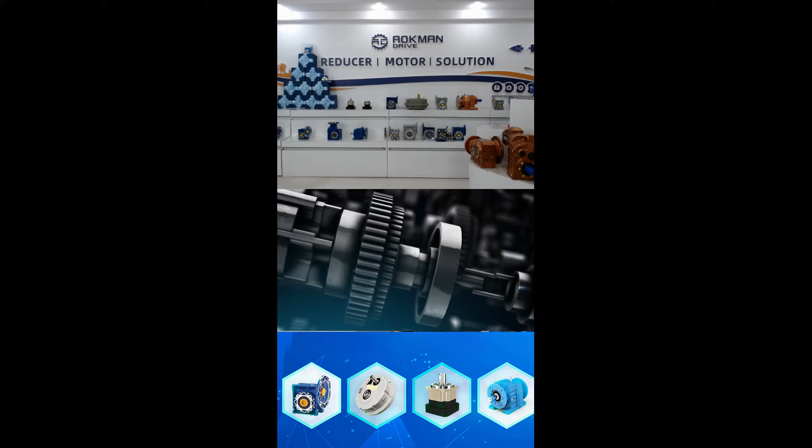AOKMAN, a leader in the manufacturing of special industrial gear units and standard gear motor. The factory was founded in 1982.

800,000 square meters of surface. Production made of more than 2,000 experienced workers. Over 30 years of experience in gearbox manufacturing.

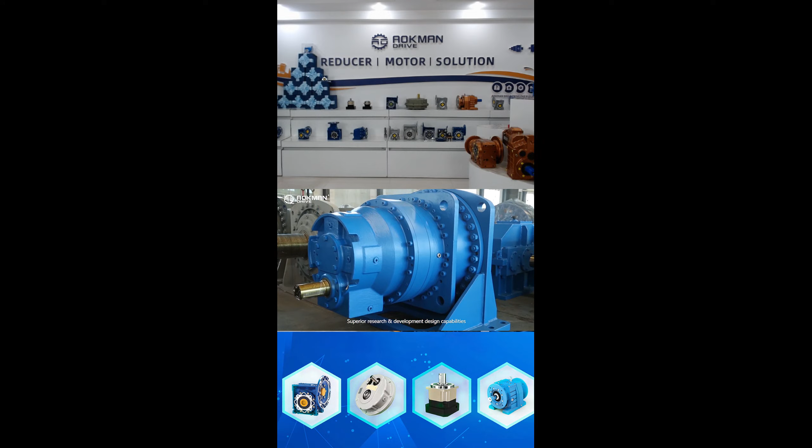AOKMAN always improved gearing technologies with the spirit of craftsmen. Superior research and development design capabilities have become the primary productive force of AOKMAN's rapid development.

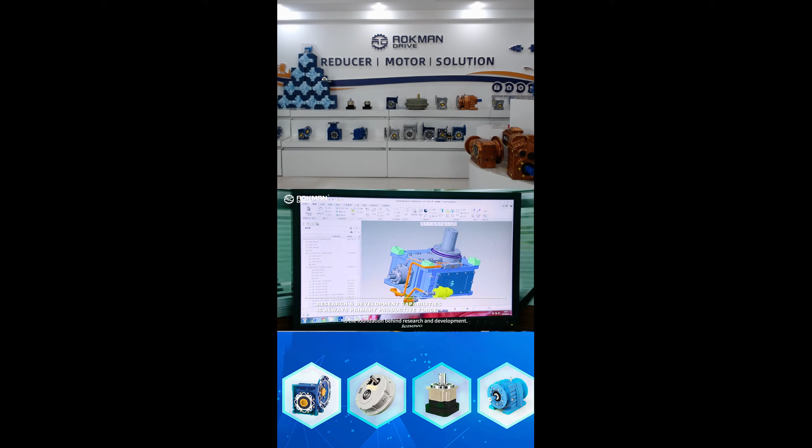R&D concept. Inspiration to provide the perfect drive solution for our customers is the foundation behind research and development. AOKMAN has a professional gear and reducer technology research and development team and reached the international advanced level in the technology of gear, reducer, and power transmission elements.

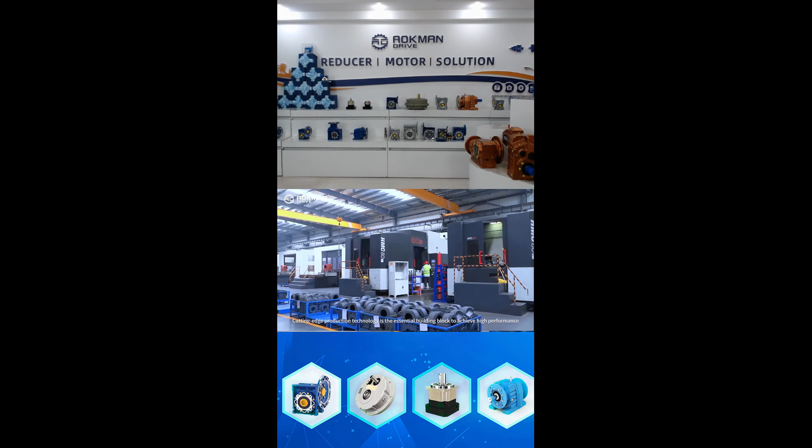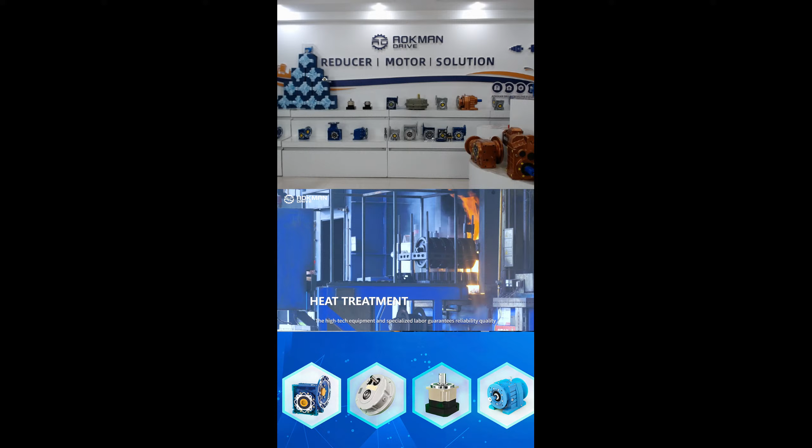Mechanical machining. Cutting-edge production technology is the essential building block to achieve high-performance geared products in order to meet what AOKMAN's customers are asking for. The high-tech equipment and specialized labor guarantees reliability, quality, and uniformity of heat treatment processes.

The industrial complex has been steadily upgraded with leading-edge machinery which ensures quality according to international norms and standards: ISO, DIN, and AGMA, and precision in producing gears with quality grade 6, ISO 1328.

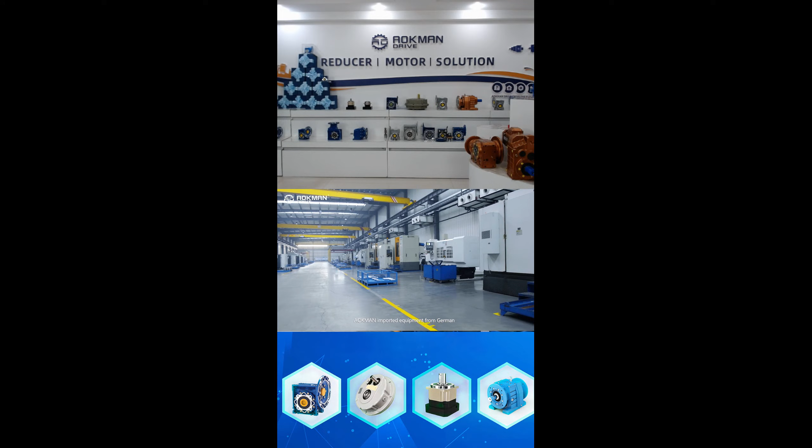AOKMAN imported equipment from Germany, such as the CNC gear teeth grinders and milling cutters. The Niles and Hoffler gear controller allows for ideal precision in gear production. AOKMAN factory offers the most efficient high-precision production lines, flexible and specialized assembly coating lines, and a digital management system.

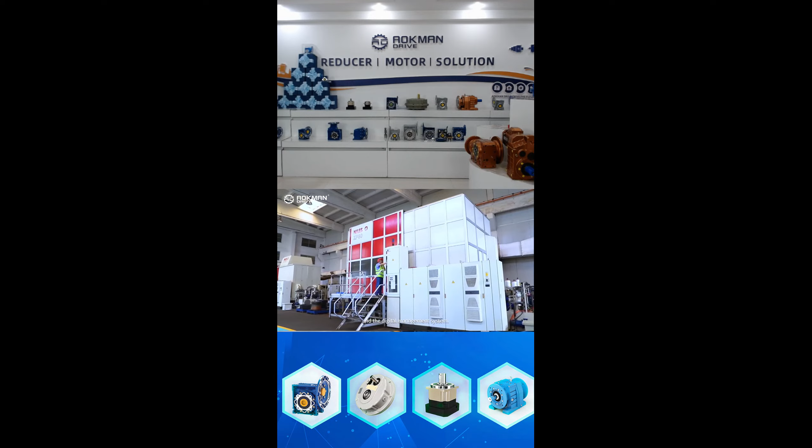Protect the environment by using natural resources wisely and seeking benefits to society and the environment.

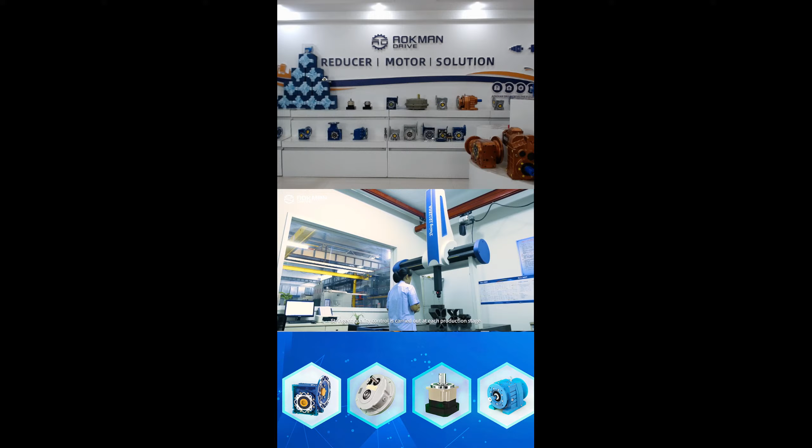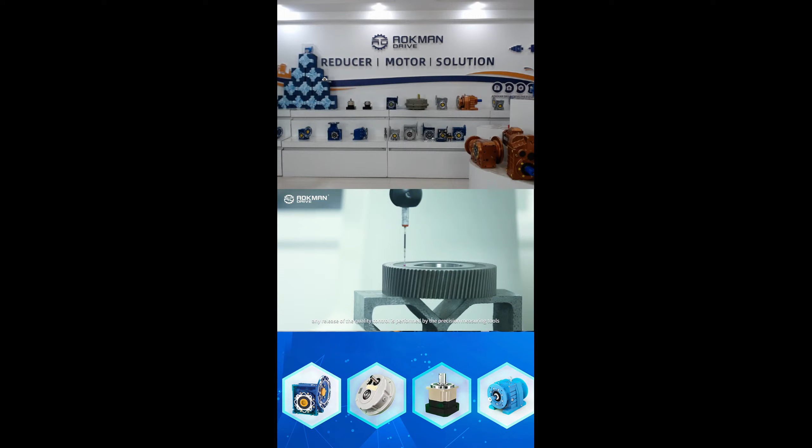Quality control. At AOKMAN, we know quality is very important to our customer, and we instill that responsibility in every employee. Stringent quality control is carried out at each production stage, from arrival of the raw materials to delivery of the tested, approved products. Any release of the quality control is performed by precision measuring tools and modern measuring equipment.

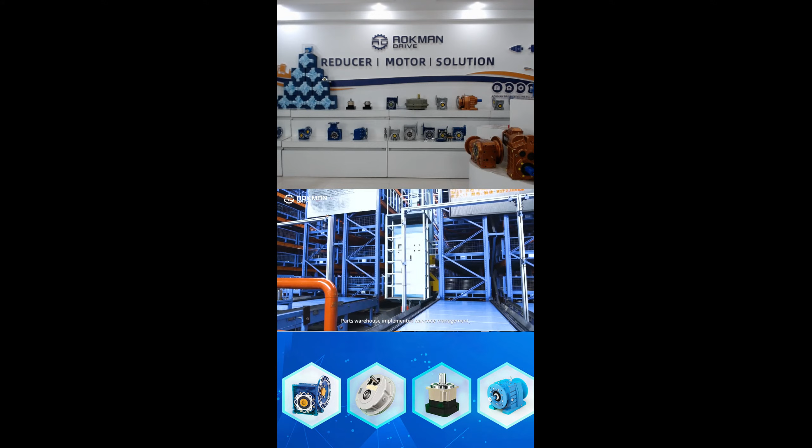Warehouse. Warehouse information management is the key to improve efficiency and fast delivery. Parts warehouse implemented barcode management, and the inventory accuracy reached over 90%. After the implementation of AOKMAN Factory Information Platform, the production capacity increased by more than 50%.

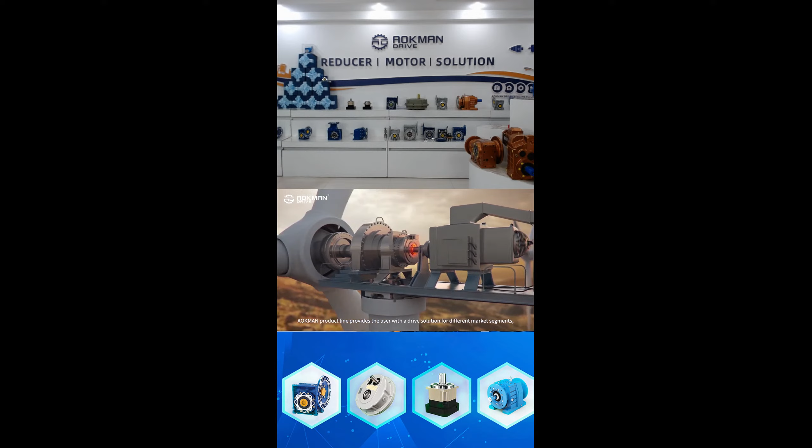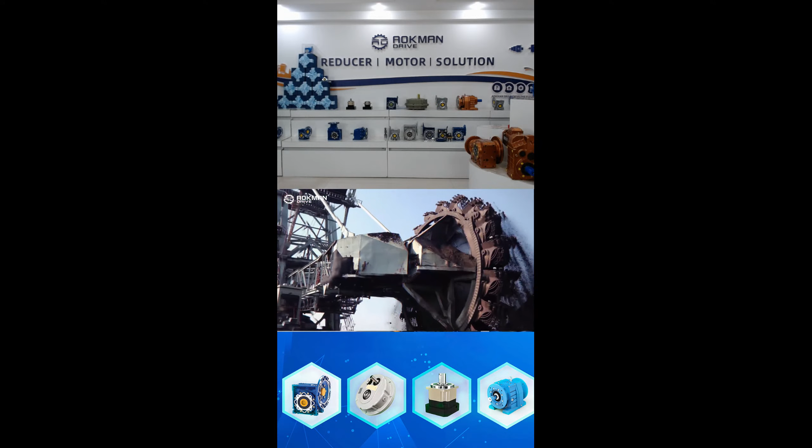Market application. AOKMAN product line provides the user with a drive solution for different market segments, such as cement drive, sugar mill, mining, pulp and paper, metallurgical, textile, packaging, agriculture, construction, food industry, automation, palm oil, and various other types of machines.

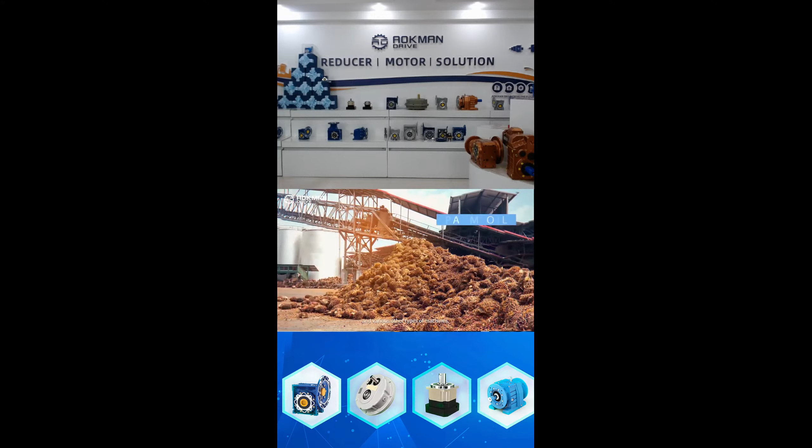Customer service. The product quality of AOKMAN allies to the security and efficiency of its management, which makes it a brand synonymous with credibility with its suppliers and customers. We are committed to winning a partner rather than a simple supplier.

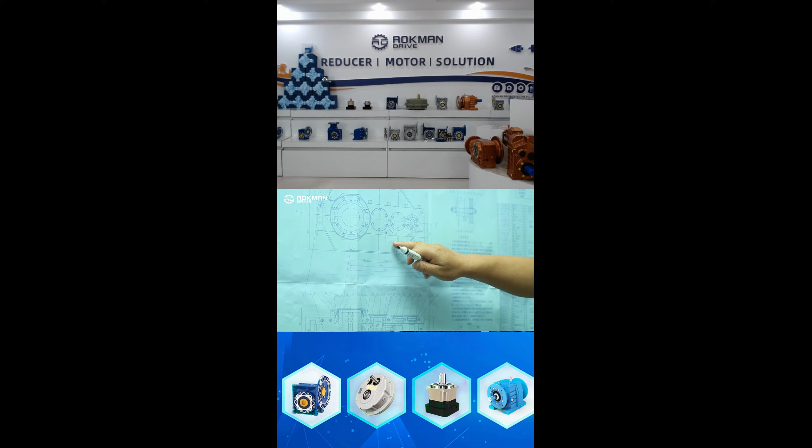Make a good deal? Always consult AOKMAN professionals. We assure you of the utmost reliability and security for both products and services. We are AOKMAN, the total drive solution provider.

AOKMAN, a leader in the manufacturing of special industrial gear units and standard gear motor. The factory was founded in 1982.

800,000 square meters of surface. Production made of more than 2,000 experienced workers. Over 30 years of experience in gearbox manufacturing.

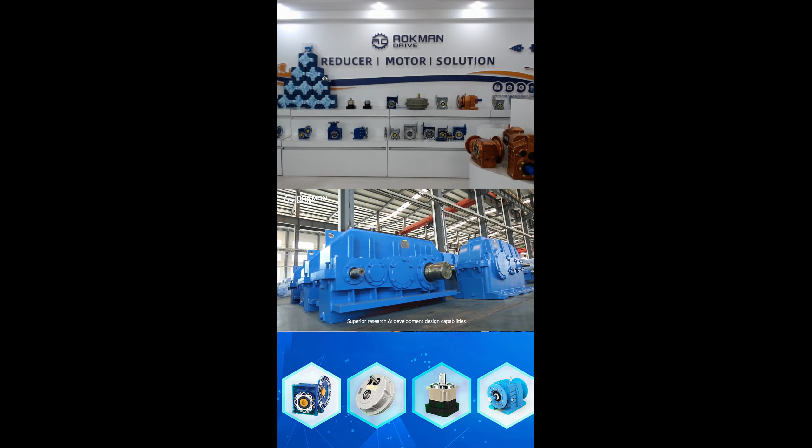AOKMAN always improved gearing technologies with the spirit of craftsmen. Superior research and development design capabilities have become the primary productive force of AOKMAN's rapid development. R&D concept.

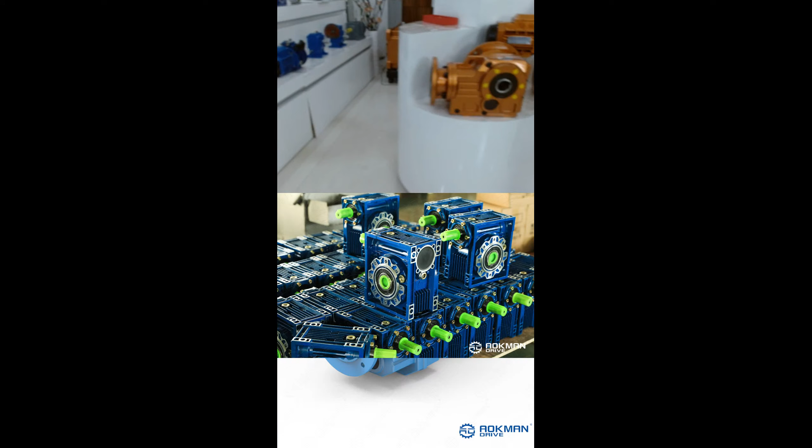Okay, next we show another popular item. You can see these gold colored items, we call them helical gear motors. Actually there are 4 items: helical bevel, helical parallel, helical inline, and helical worm. They're all made with steel cast iron housing, different from the worm gearboxes. But they all look very beautiful because we make very precise precision on the outlook. They're so popular because they provide very wide range ratios and torques, so they can meet a majority of applications in the market.

I guess many of you start your business or enlarge your business may start from these items. It will help you, it will benefit your business.

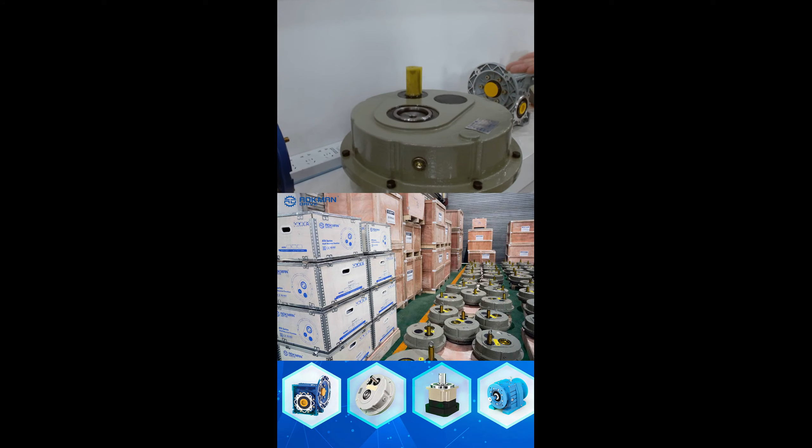Okay, next we show you the shaft-mounted gearboxes. This one we call the TA series gearbox. Like Cassie said, this is a shaft-mounted gearbox. We can tell the details and design is like a round one. This one has wide application in mining, quarry, and conveyor belt related industries. AOKMAN here is the best supplier here. The reason is from the design, quality, production capacity, and all the details, we can tell we are the best TA series supplier in China. So if you're looking for this kind of gearbox, AOKMAN will be your best choice.

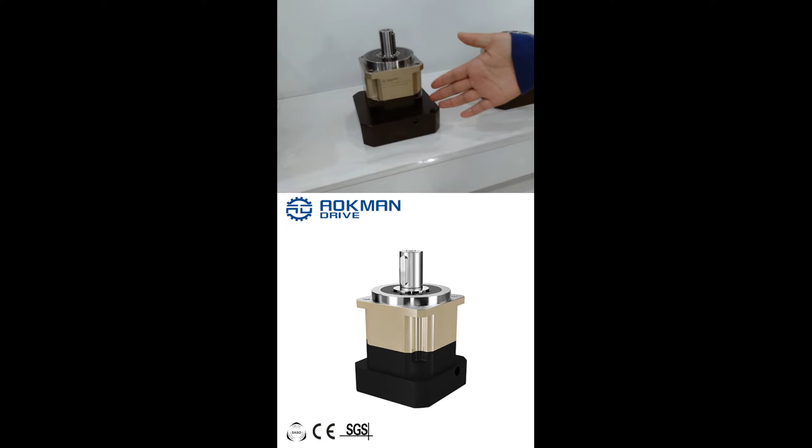This one we call high precision planetary gearboxes because it provides very precise backlash, so it can be useful on CNC machines, AGV trucks, printing machines, and machinery arms for robotics, for turning. So if you need very precise control, you need to consider this one. I think this one is very popular this year and will continue to be popular in the coming years.

Okay, we have finished showing all the standard popular items. I think many of you already have a brief idea about this. If you need more features or want to know how to identify this item, don't go anywhere, stay in the live show. My colleague will show you more details later.

Okay Kurt, we have shown the standard items already. Yes, so AOKMAN here, this is the first part of our products, the standard items. Standard items mean we can produce a lot at one time, but we can also satisfy other projects we call custom-made projects, because some customers have special requests. So Cassie, do you have such experience or a project example? Yeah sure, actually custom items are another strength for AOKMAN because we have 300 people in our R&D department. They can design your paperwork, your draft strategies into reality.

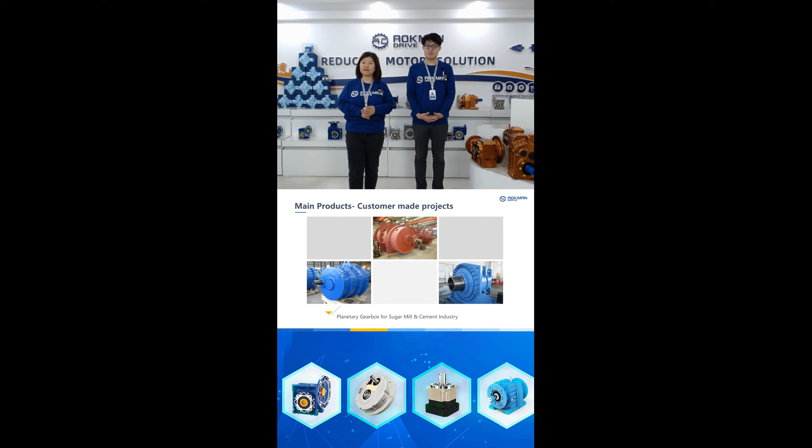Okay, next you will see we have planetary gearboxes. They are used on sugar mills and heavy-duty applications like cement and mining. Okay, next you'll see special items. This one is different from the standard items, the shape is very different. We provide custom items considering not only function but also installation dimension requirements.

So even though they look very special, we need to keep the cost down at the same time. So we just finished the product part.

Some of the audience and customers may be wondering how we prove we are the best or one of the leading gearbox manufacturers in China. We are going to move to the next part, the investment, because we actually invest a lot of money on equipment.

Let's go to the next picture. This one is also from Europe, one of the top brands, from Austria. It's used for the heat treating process, which is very important for the gear. It increases the hardness and also increases the lifetime of the gear.

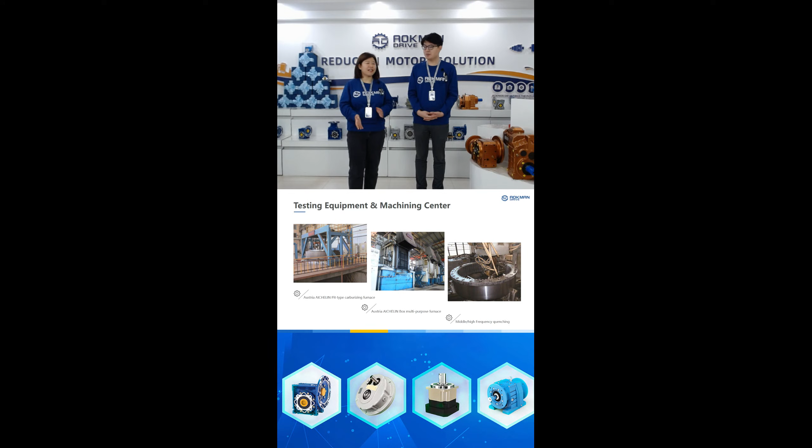Finally, this will save the customer money. Okay, let's move to the next picture.

Here is a real shot of our CNC workshop. This is where we process our parts and accessories, lined up really well. We use all process machines imported from Europe and the US. This one is actually from the USA, one of the top 5 brands.

So we invest lots of money on equipment, because that way we can make sure we always choose from the best supplier and also make sure our quality is good.

We have given a brief introduction about our product and equipment. I think many of you may be wondering how about AOKMAN quality control. This is very important for our customers, and also for us.

We have ERP meetings before each project and production moves forward, involving the technical department, the production department, and the QC department. Sometimes we invite our sales department to attend this meeting to make sure we understand the customer requirement while also keeping the cost down.

Another thing is from raw material to delivery of the finished item, the whole process is finished inside our factory. This helps production move more smoothly, while at the same time keeping quality control stable.

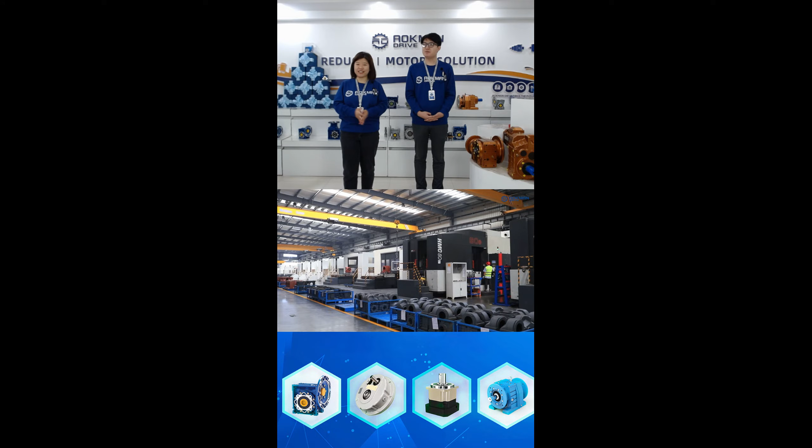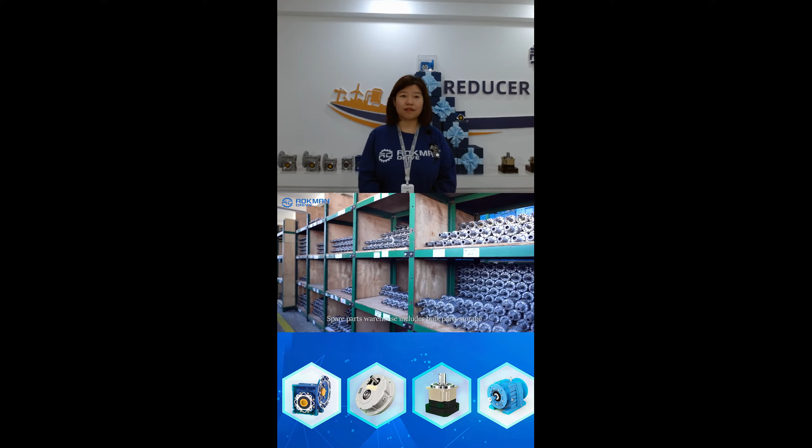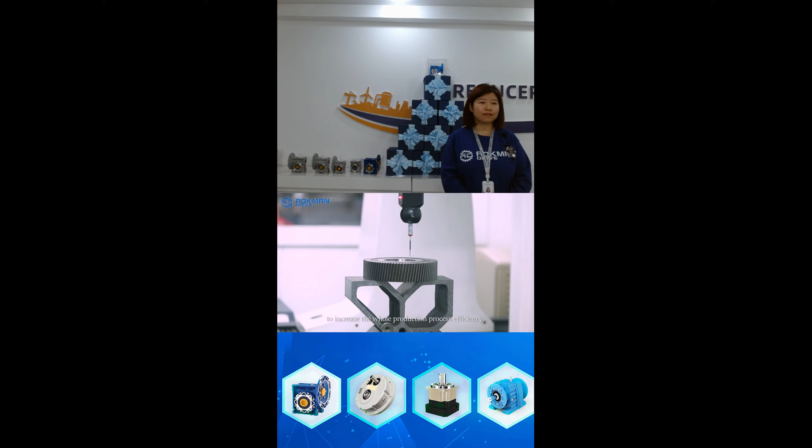AOKMAN spare parts are available. This not only shortens the delivery time, but also meets customers' bulk orders. The spare parts warehouse includes bulk parts storage, housing part storage, gear storage, and so on. It adopts an automated management system and AGV delivery method to ensure production is finished on time. AOKMAN QC checks each part before storage to increase overall production efficiency and ensure gearbox quality.

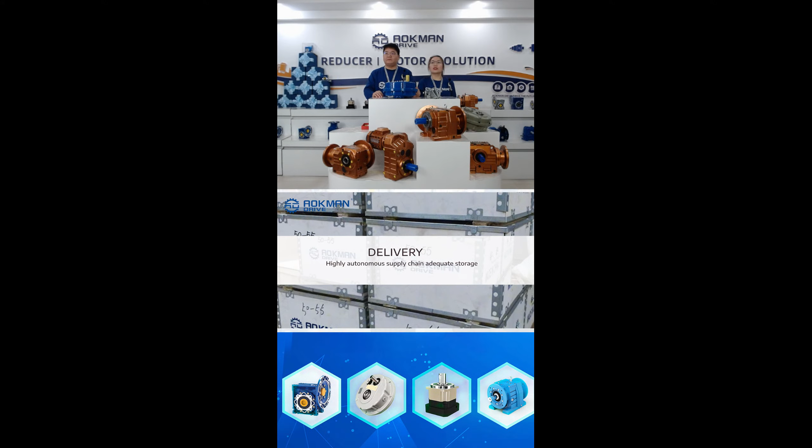This is a gearbox in our factory, and this is a semi-finished product. This is the packaging, this is QC, and this is our delivery. This is our factory equipment, and our colleagues are packing and testing them. This is the application in mining.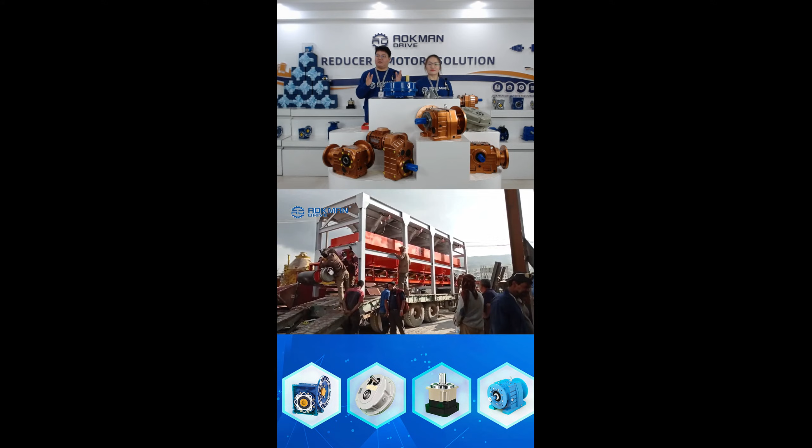Okay, this is our ATA gearbox warehouse. This ATA gearbox is used with the belt conveyor, like this. And this is the mining factory and quarry. So great, this is so great.

Okay, this is our AOKMAN ATA gearbox used in our customer's factory. Many thanks for watching this video. If you have any questions and need more details, please tell me. I will reply as soon as possible. And follow us and follow AOKMAN in the future. If you have any question, we can help you.

Just now we saw the video from our clients' feedback, because if you are in belt conveyor, stone crusher, mining industry, the ATA shaft mounted gearbox is your best choice. The ATA gearbox is most popular and welcomed in this business, like mining, quarrying, stone crusher, belt conveyor, and roller.

Except the ATA shaft mounted gearbox, we also have helical gearbox, helical bevel, and other industrial gearboxes also used in these plants. Today we are mainly introducing for you the ATA shaft mounted gearbox. It generally will be used in high shock loads, dirt, and corrosive environments. So the ATA shaft mounted gearbox has good sealing and dust-proof function, giving absolute reliability and low maintenance cost.

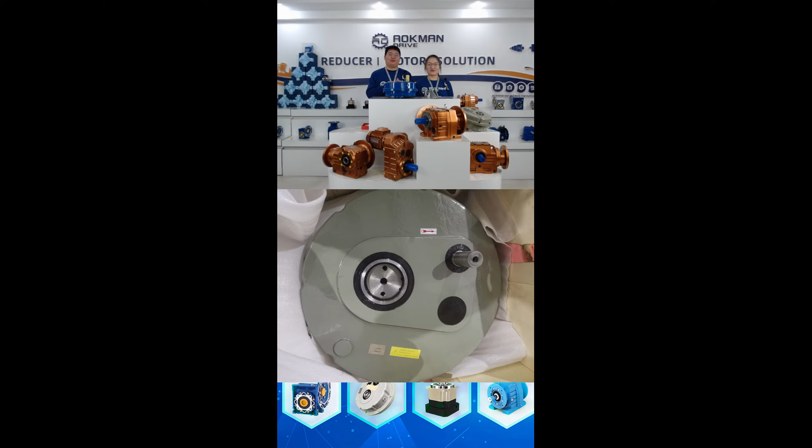Green and blue are the most popular colors in our market. So if you are interested in our shaft-mounted gearbox, please leave a message to our customer service department and send your requirements. We will reply at once. Just now we talked about the color, the ratio, the bore size, and so on. Not only is the gearbox good, our packaging design is also very amazing in the market. So next, Andy will show some pictures to introduce our ATA gearbox packaging design.

Okay, you can see these pictures. This picture is for our small model. There will be a white part, you can see that is a soft material. We will cover the shaft-mounted gearbox with it to protect the gearbox during transportation.

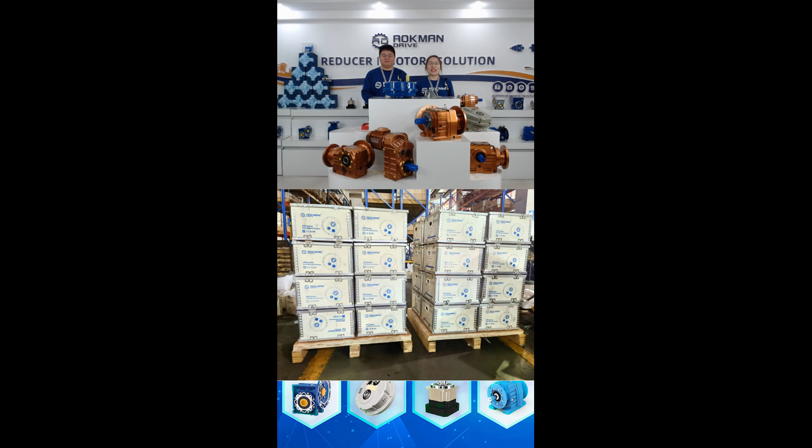Next, you can see that is very beautiful packaging, customized design for our distributors. You can see one pallet - through these pictures, we can see one pallet with 12 pieces for smaller packaging, for smaller gearbox models such as 40, 45, 50, and 55 like this. One pallet may have 12 pieces, or maybe 24 pieces, depending on the gear size.

Okay, you can see this - I think you asked one question. This picture is for a larger gearbox model. Yes, the bigger models such as 70, 80, 100, 125, and 135, we have this packaging design. For the bigger model sizes like this, we will pack it separately, and the wooden packing is thicker.

We can see the bottom with wooden feet. The wooden feet make it easy for delivery. It's a very humanized design because with the wooden feet, it will make the transport easier, make the worker's job easier. Okay, let's check the next picture, please.

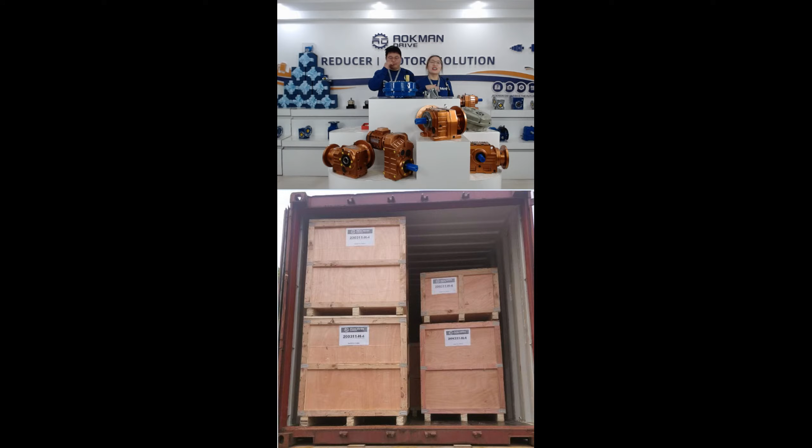One container goes into our client's warehouse or factory. For one container of gearboxes, there are about 200 to 220 pieces. Because the shaft-mounted gearbox is very popular in our market, our clients ordering one container or 5 containers is very common, because this gearbox is popular in their market.

So next, I want to show you a packaging video to share more details. Yes, this is the green color. This is the one container of gearboxes finished and ready to ship to our customer.

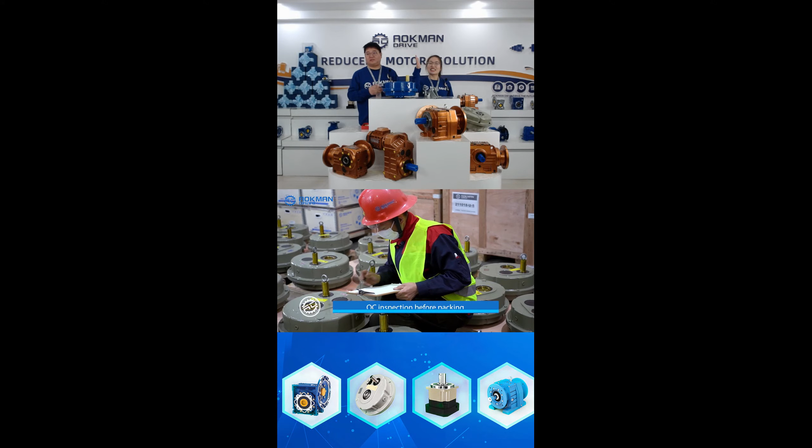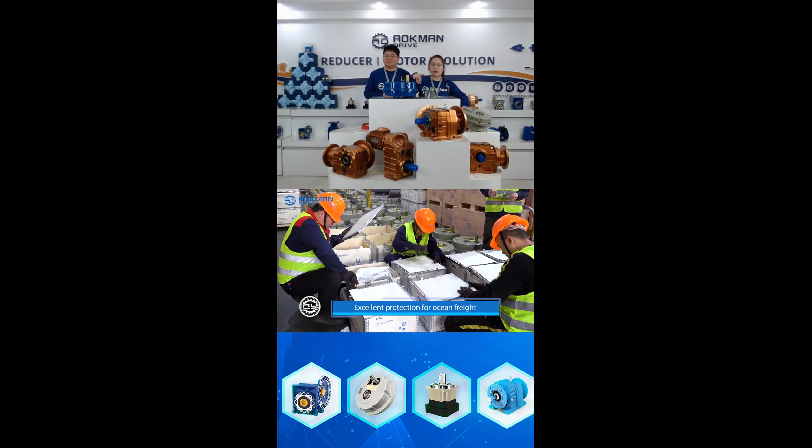So for our gearbox, we make sure our quality is the best. The video you just saw was very short. Maybe in the showroom you can only see the short video. If you want to get this video, you can contact our customer department and we can send it to you to check on your own phone.

We have lots of pictures and videos for our gearbox, such as boxing, packaging, quality and finished gearbox. If you want more details, send your email and mobile phone number and I will send this picture and video to you as soon as possible. You can show this video and picture to your customers.

Because AOKMAN shaft-mounted gearbox is professional, if you want to know more details, please contact our service department at once. Please remember, free samples are also available in our showroom. You can get a free sample to test our quality, see our color, and check the import and

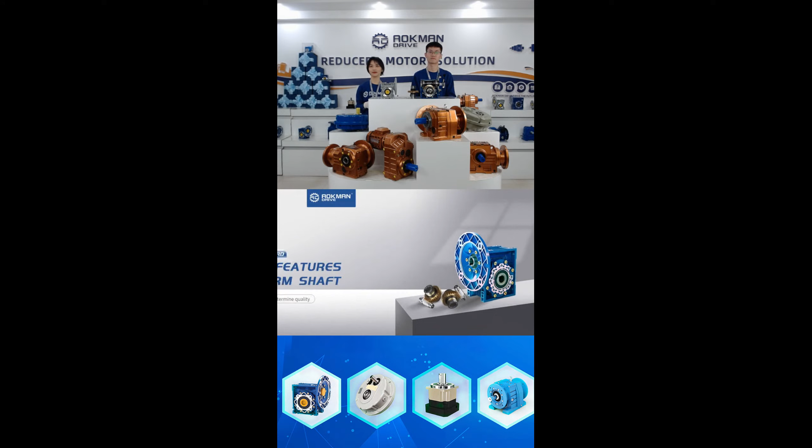This is inside of the worm gearbox. It's bearing, worm shaft, and worm gear. This is AOKMAN worm shaft compared with others, and it's very clean. Is this for the detection?

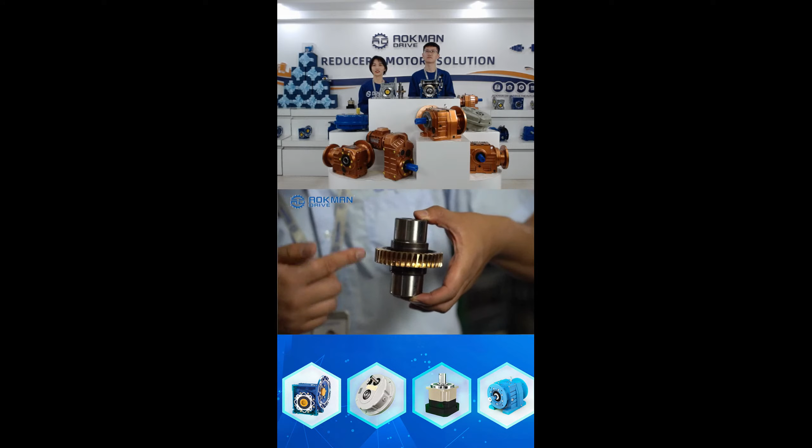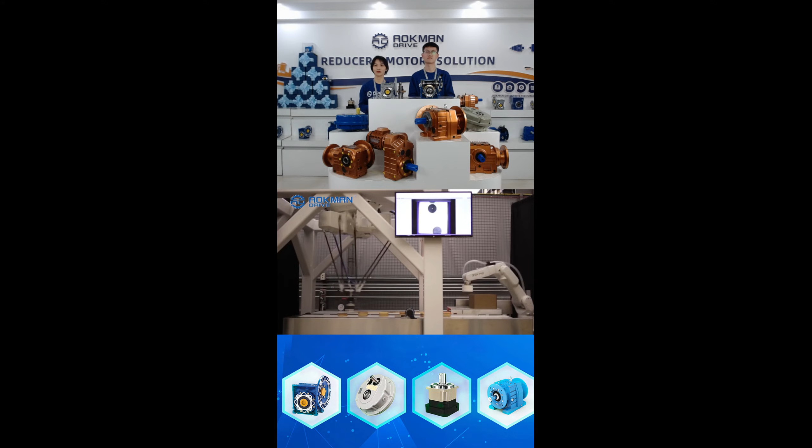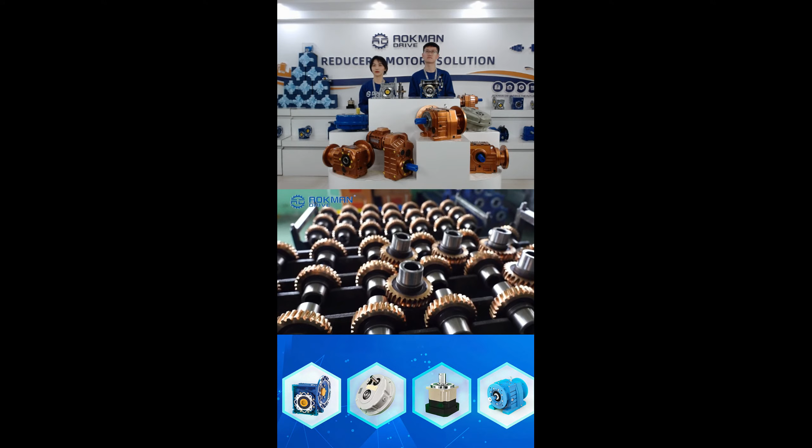Why is AOKMAN RV better? AOKMAN worm gear has an involute tooth profile, which has high transmission efficiency and has been chamfered. The noise during work is low, and the transmission accuracy is greatly improved. In contrast, other brands use an Archimedes tooth profile with relatively low transmission efficiency and no chamfering process, making the worm wheel noisy during work. Furthermore, the worm gear and worm shaft are easy to collide, which seriously affects transmission accuracy. AOKMAN worm gear is made with precision machining, making it more wear-resistant, with longer service life and higher transmission accuracy. Other brands use rough processing, which accelerates wear and severely shortens the worm gear's life.

Thank you for the video showing the transfer process from our engineer. Maybe the video is also not very clear, so if you have interest in our gearbox, you can visit our factory. I will take you to visit our professional process and our professional machines, which will make you more clear about AOKMAN's process and our gearbox, as seeing it in person is more informative than a video.

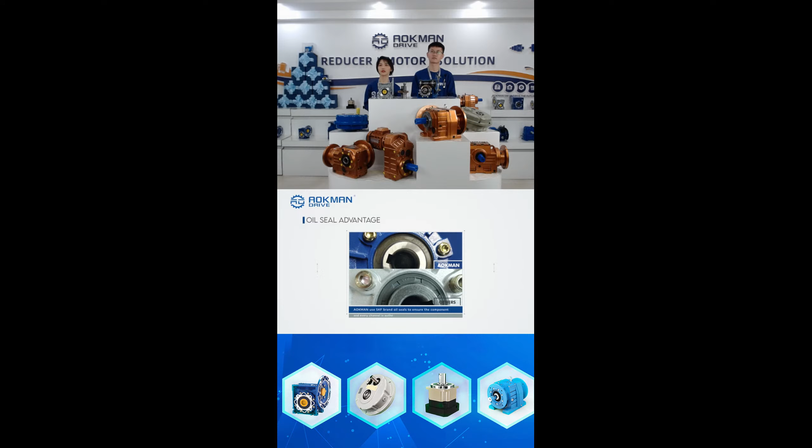Until now we have shown you the AOKMAN RV series important components: the housing, the worm gear, the worm shaft, and also the bearing. With all these best components, it still needs the assembly process to let these components come together and finish the worm gearbox.

Next I will show you a video about our assembly process. Let's see the video.

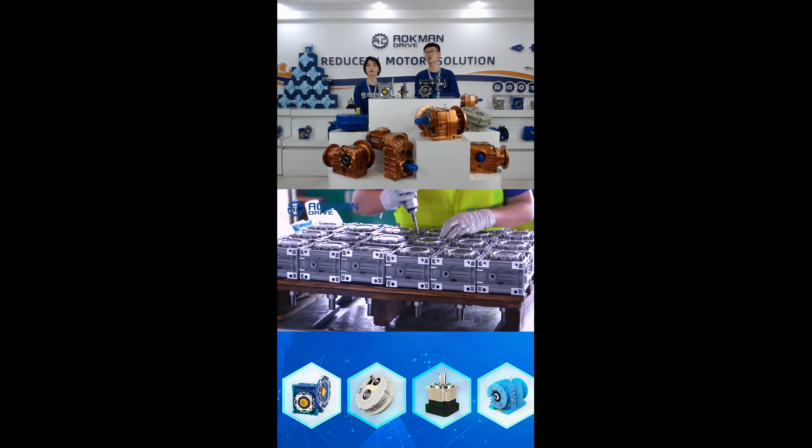You can see this is the AOKMAN assembly workshop and also our professional assembly working machines. And this is our assembly workers. They all have a very long time of experience in this industry to ensure mature work.

You can see they are assembling the shaft. Yes, it's a shaft, and also they are assembling the input line. And this is test. Every AOKMAN unit will be tested before delivery to ensure the same performance and good quality.

Thanks Liu for showing the assembly of our RV worm gearbox. Maybe now you will be more familiar with the process.

Next I will show you some pictures of our finished products. You can see this is our blue color, small model RV worm gearbox.

As we know, the small model is from RV30 to RV90. We also have the big model, which uses cast iron, a different material. For the small model we use aluminum material.

Next one, this is the standard NMRV. It has the input flange and the hollow bore. And the next one, this is a big model, the cast iron housing.

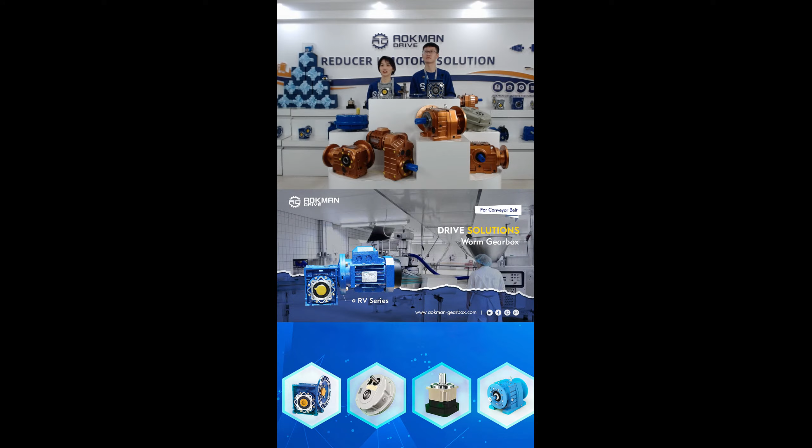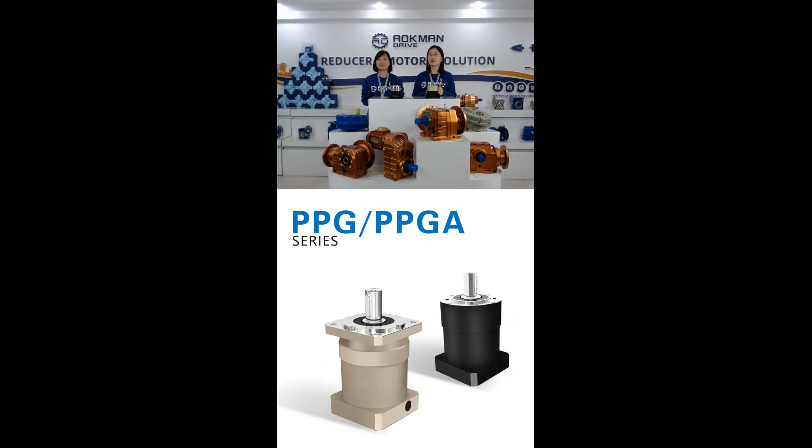The first one is PAB inline type. The next one is PABR, the same type but right angle. Another one is PPG. Next is PPG and PPGA, just a different design. And the next one is PAD, then PADR. So you can see these gearbox types include inline and right angle types with different designs.

I like all of them because they are in beautiful colors and very special designs. Next, could you introduce some professional technical data to us, such as the ratio?

When we talk about the gearbox ratio, we need to separate one-stage gearbox and two-stage gearbox. For the one-stage gearbox, the ratio range is from 3 to 10. For the two-stage gearbox, the ratio range is from 12 to 100. So you can see the ratio range is very wide.

For high precision planetary gearbox, it also has a special feature that other gearboxes don't have, that is the backlash. So could you give me some professional introduction about the backlash?

The important technical data is backlash. For this type of gearbox, the special feature is about backlash. For the one-stage gearbox, the backlash is less than 3, very very small. For the two-stage gearbox, the backlash is less than 10. So you can see the backlash is very small. Please note that different ratio and different model numbers have different backlash, so if you want to know the exact backlash, please tell us your exact demands.

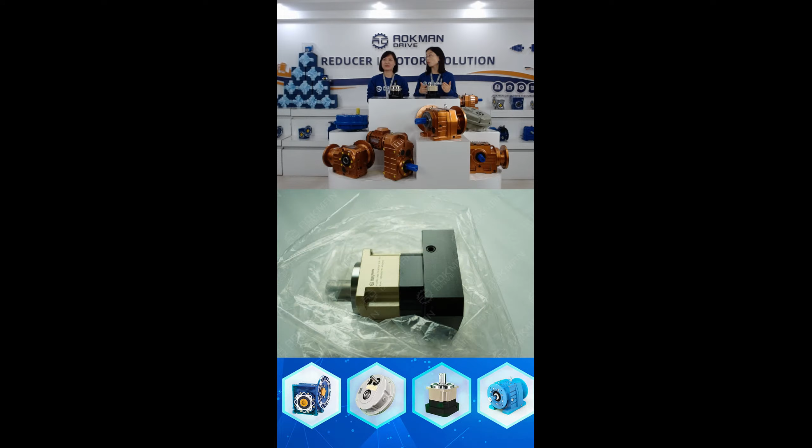Then how about our packaging to guarantee long distance transportation? The package is also very important because of our long transportation distances. You can see the picture first. For this type of gearbox, inside we directly use plastic to protect the gearbox, it's a very good seal. And outside we use a carton box.

You can see the next picture, this is the outside package. You can see it's very clear, a special design for high precision planetary gearboxes.

By the way, for the big model number, we will use a wooden case to protect the gearbox.

Thank you for the video. Yeah, it's a very detailed package introduction, one by one and layer by layer. It's a very sturdy package.

Then how about our installation? Before installation, we must check the reducer and the motors and guarantee they are in good condition, check the size of each spare part and make sure they are matched, and confirm the dimensions matching the motor's transmission, input shafts, and reducer's groove.

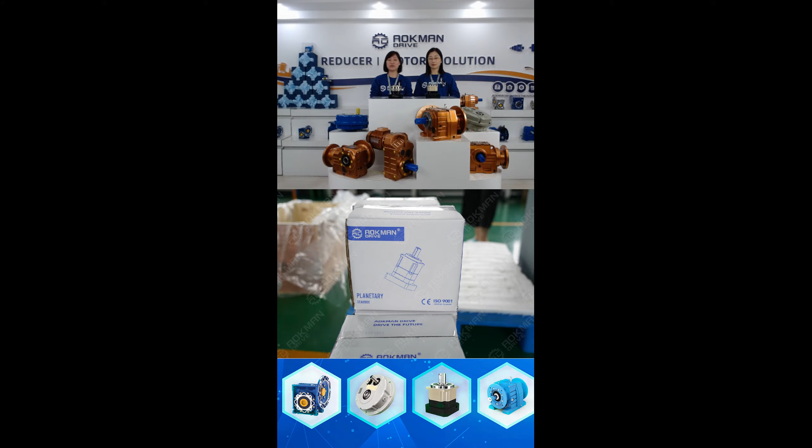As we mentioned before, AOKMAN products are also produced as per international standard, so we have got many international licenses or certificates. So could you tell me which certificates we have and how many countries they are exported to?

For this type of gearbox, we have passed ISO 9001, CE, UL, and we have exported this type of gearbox to America, UK, Peru, Dominica, Brazil, and other South American countries. Many customers use this type of gearbox in CNC machines, robots, laser machines, cutting machines, and so on. Our gearbox are working well in their equipment.

Dear friends, please follow me. I will share with you our high precision planetary gearbox video, including its applications. Let's watch it together.

This is the PAB in-line type, it's hot selling in the market. This is an application video, the gearbox working well in customers' equipment, so they would like to send some video to us. Here's another video, you can see the package.

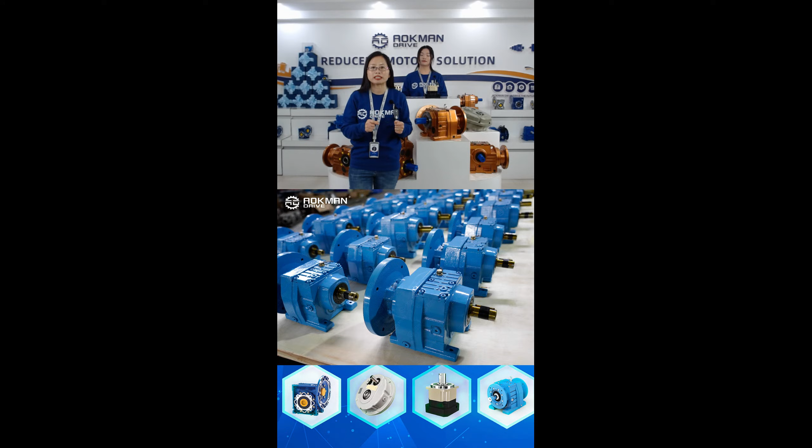How about the motor power range to connect with the AOKMAN 4 series gearbox? For the R series, the motor power range is from 0.18 to 160 kilowatts. For the K series and F series, it's from 0.18 to 200 kilowatts. The power range is very wide, so this type of gearbox can be used in light industry and heavy industry. Later we will show you some application pictures and videos to help you know it clearly. For the S series, it's from 0.18 to 22 kilowatts.

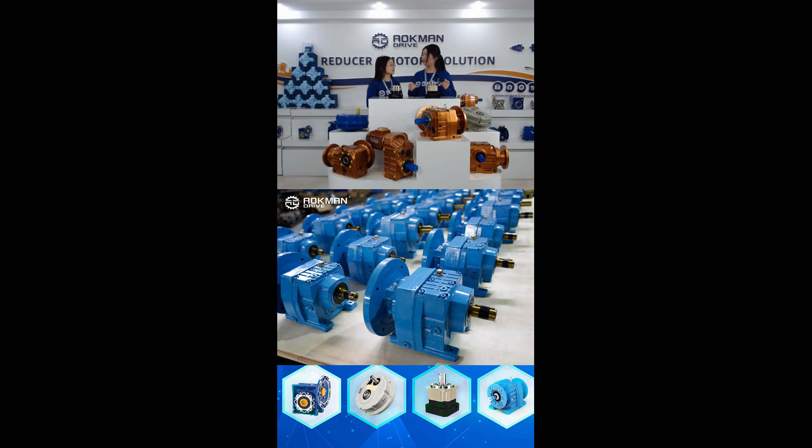Okay Anna, I think this is also good, and it can help customers choose the suitable model size according to different applications. Yes, you are right, that's great. And next question, okay please.

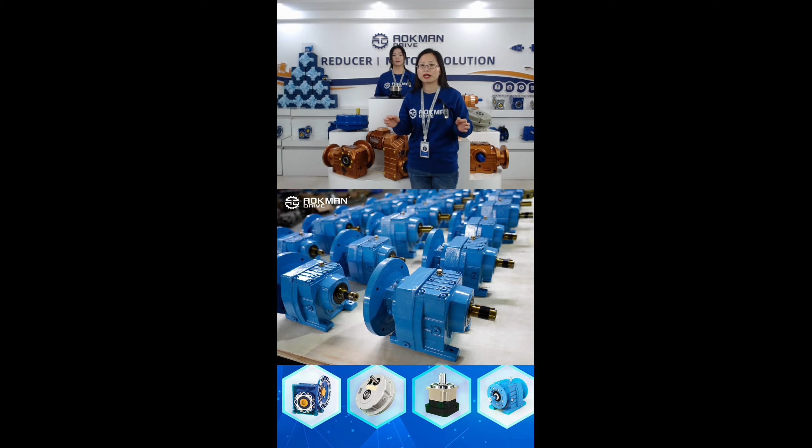How about the speed ratio for the AOKMAN 4 series gearbox, can you introduce it? No problem. For the ratio, the range is also very wide. For the R series it's from 1.3 to 289.6, for the F series it's from 3.81 to 281.71, for the K series it's from 5.36 to 197.27, and for the S series it's from 6.36 to 292.5. The ratio range I just mentioned is very wide, so this can meet different requirements for different working conditions.

As far as we know, the speed ratio of the gearbox is an important technical data that we need confirmed by the customer before we recommend a suitable model size.

Yes, right? Okay, that's great. So maybe also have the other technical data needed we confirmed by the customer. Yes, okay, you are right. Let us continue.

Can you introduce how about the torque for the AOKMAN 4 series gearbox? For the torque, it can achieve high drive torque up to 50,000 Nm, except this S series. This kind of torque can reduce the operating cost for customers. According to different customer requirements and applications, there are different required torques. This technical data of the torque also needs to be confirmed with the customer, combined with reference.

Yes, you are right. Actually, this we can confirm with the customer, and also we can calculate based on the customer's specification that they provided to us. That's great, thanks Anna.

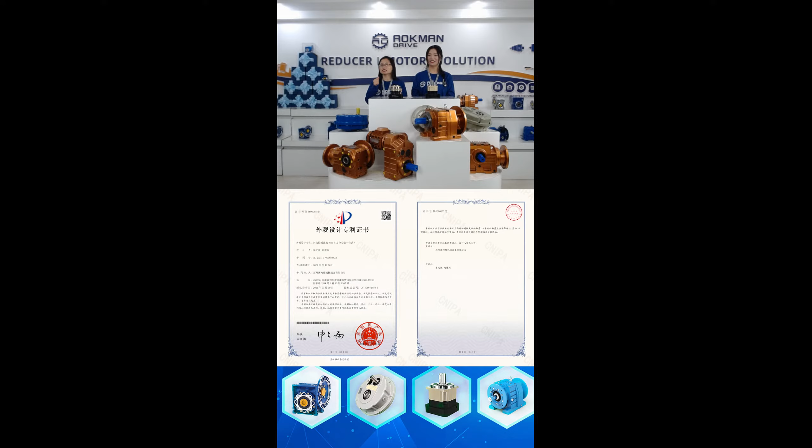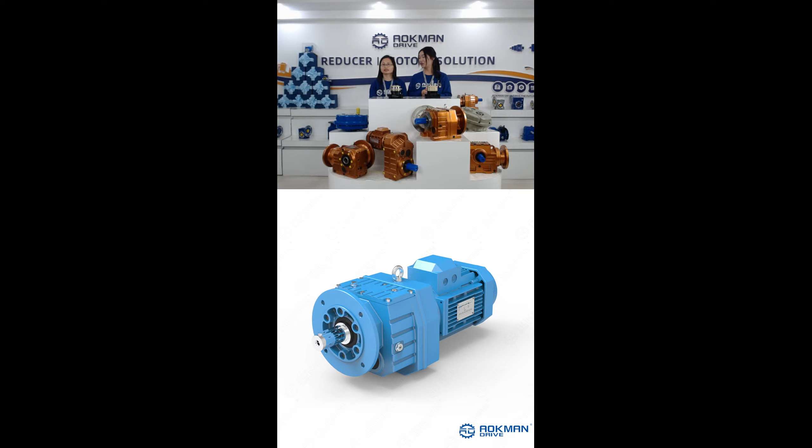We will show you the picture of our products. This is the R series finished products. Actually, I forgot to introduce our new type R series inline helical gearbox certificate — this is the certificate we got. Next, you can see our R series gear unit with the blue color. This is our F series gear unit, also with the blue color.

Anna, which color do you like? I like blue color. How about you? I prefer both, because I think each one has its own advantage. Maybe customers also have different requirements for colors. You're so right. You can also leave a message to our service person, and we will provide the best drive solution according to your requirements.

Now you need to introduce the packaging ways of the AOKMAN 4 series gearbox. We do standard and more safe packaging to try to avoid any breakage or damage during transportation. We will show you our package wooden box, you can see the picture.

From this picture, you can see our R-series inline helical gearbox put into the standard export wooden case. You can rest assured this wooden case is of the best quality, and safe delivery of the goods can be guaranteed during transportation, so customers don't need to worry about any damage during transportation.

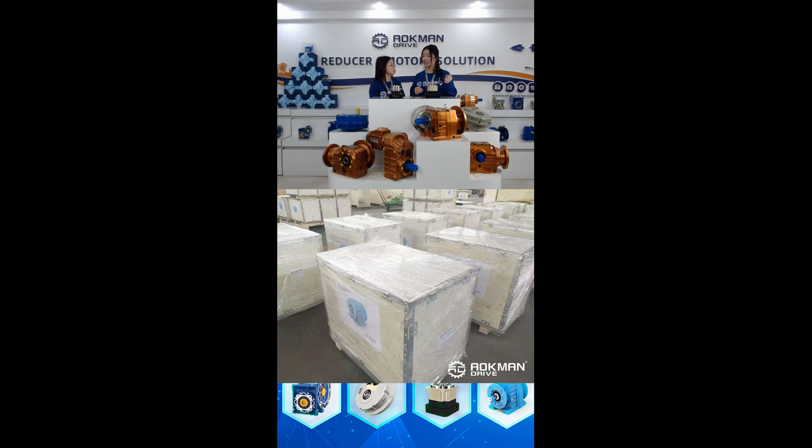We have talked about the details of the gearbox, and now I also want you to introduce the main process during production that ensures the AOKMAN gearbox and motor run smoothly. This is also a very good question, because it relates to quality — all the bearings, gears and other parts must be tested in the middle of production, and also 100% tested for every finished product, in order to guarantee reliable quality and smooth running for end users.

So the factory testing is very important. Strict factory testing is important for the customer, and also for AOKMAN, because we need to respond to customers' sense of use.

Anna, what are the main applications for the AOKMAN 4 series gearbox? This 4 series application range is very wide, such as packaging, food industry, mechanical, chemical, mining, cement, sugar mill, environmental protection, and other fields. Later, we will show you some application pictures and videos to help you know exactly what the applications are.

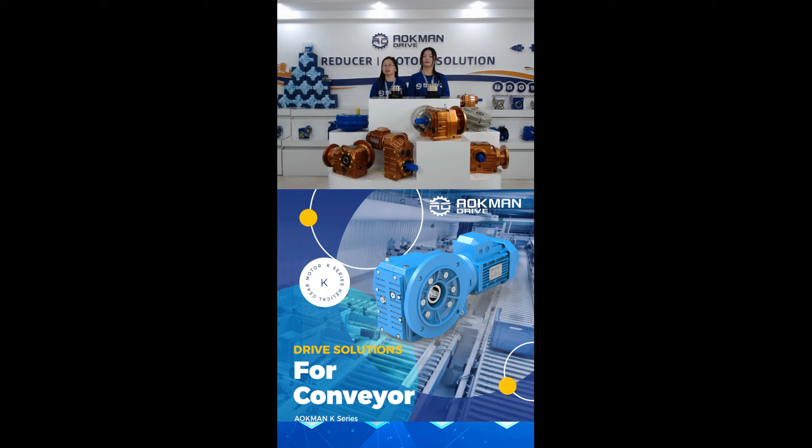This is the finished K-series helical bevel gearbox. This one is also finished products ready to ship. This is the K-series applied on conveyor, and this is also the K-series applied on conveyor.

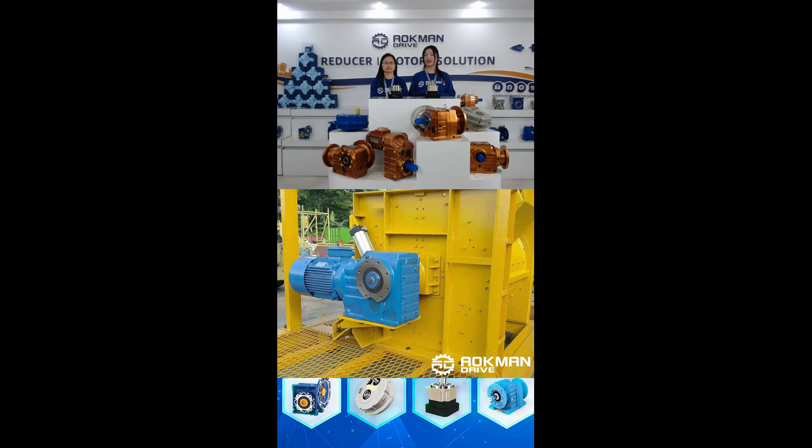At the same time, we also prepared a detailed video about the AOKMAN 4 series gearbox. Please refer to it.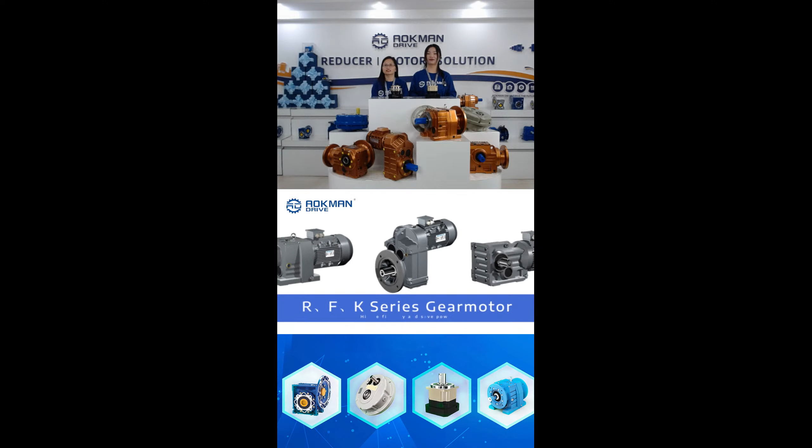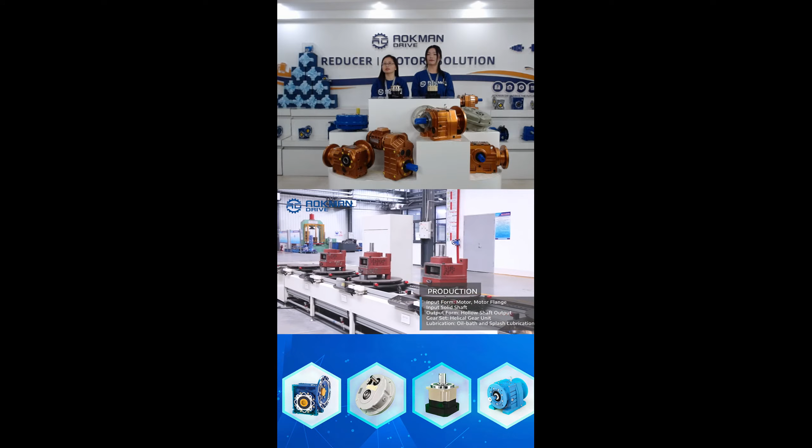This is the R, F and K series. R series finished products, F series finished products, and this is K series. This shows different options for mounting positions and output types, and this is for detection. This is the housing line, production line, and the finished products with blue color. We also mentioned we have green color, and we can customize the color based on customer request.

This is the application on different industries, such as packaging. From the introduction of our colleagues about our 4 series, I believe you will know much better about our quality control, packaging, and design. We pay more attention to all the details because we know quality is the most important thing for our customers, and also very important for us. We don't do one-time business with our customers; we are committed to winning a partner rather than being a simple supplier.

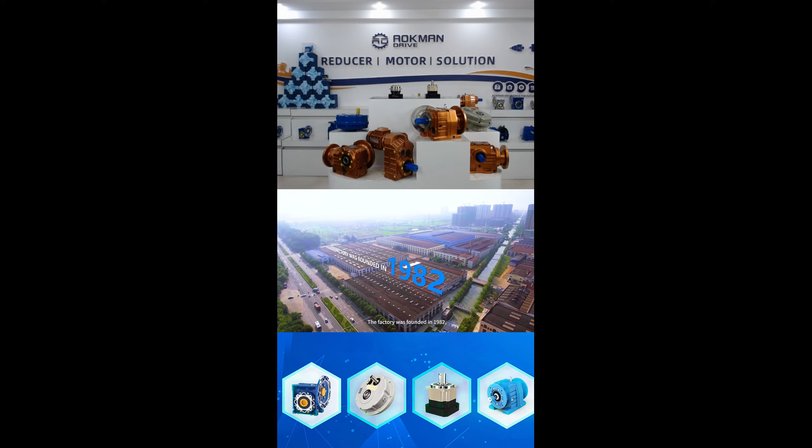AOKMAN, a leader in the manufacturing of special industrial gear units and standard gear motors. The factory was founded in 1982, with 800,000 square meters of surface, and production made by more than 2,000 experienced workers.